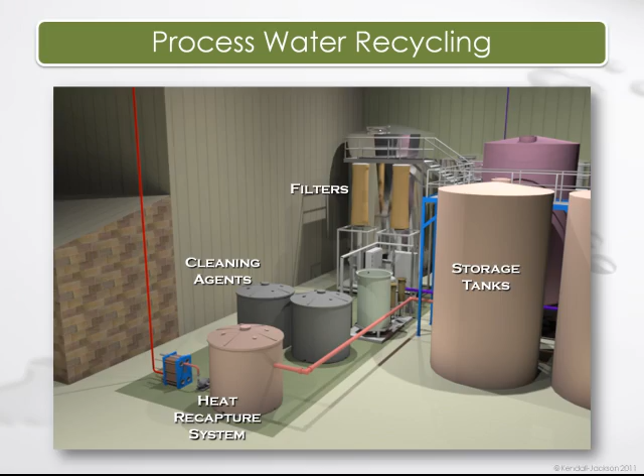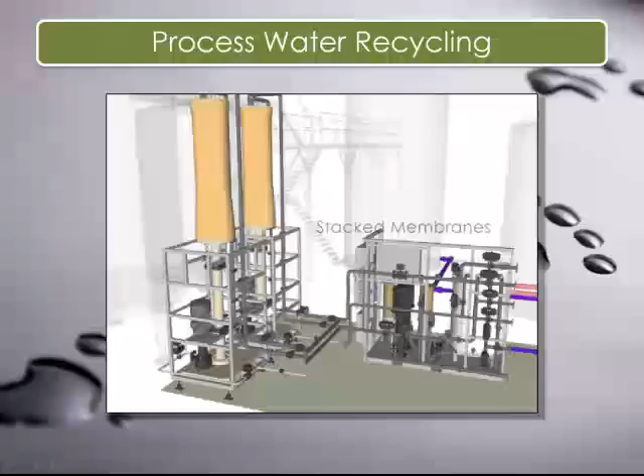All right, so the filters are really the crux of the system, and let me explain a little bit about them. They're a vibratory shear enhanced process. They're a reverse osmosis filter like you might have under your sink, but instead of being a column or a tube, they're a series of stacked membranes or plates of filters laid one on top of another. Imagine 30 of them stacked up in those columns there, one on top of another.

And the other big difference from a regular filter is that it actually oscillates or rotates back and forth on its axis 50 times per second. So those are two big differences: they're stacks of filters, and they're also oscillating back and forth.

In a regular crossflow filter, you've got dirty water that's pressurized up above, and you've got these red and gold balls which represent suspended and dissolved solids, which are trying to get through the filter, but they're a little too big. It's designed to only fit water molecules through, which continue to pass through. But over time, the solids start to get stuck in the pores of that filter and make it really inefficient.

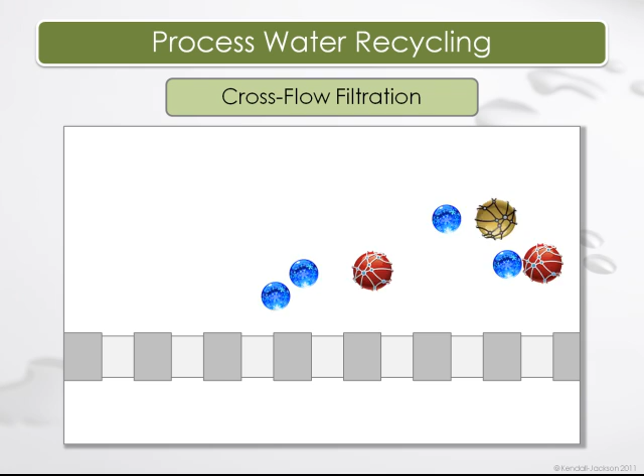And what that requires us to do is then to reverse the process, to push water up and backwash it out, to get all that gunk out of there. Well, that's really inefficient and very costly, and nobody does that process for water. Some people do it for wine because it's a higher value material, if you will.

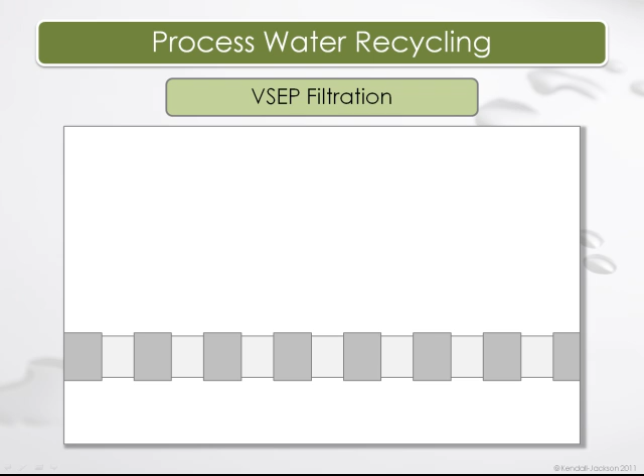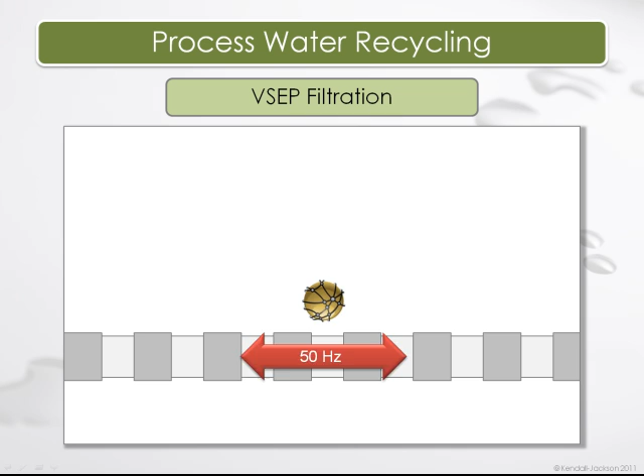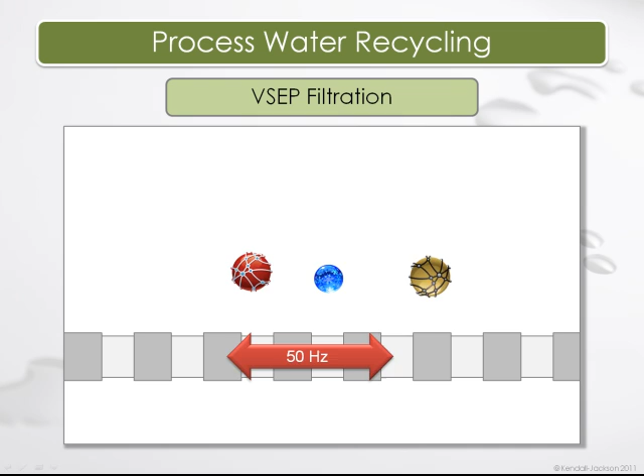But if we go back to our VSEP system, remember it's oscillating back and forth 50 times per second, and as those solids come through and they try and get into those pores and get stuck, they're jostled loose and they pass by, and the water can continue to fit through the openings, but most of the solids continue by, and it requires far fewer backwashes and it's a much more efficient system. So it's more efficient, which makes it cost effective.

Not only is it effective from a cost standpoint, it produces extremely clean water. So the water that's filtered actually is better than the EPA standards for potable water. Now, we put together our testing regime in conjunction with the University of California at Davis and the California Department of Public Health. We ran 10 different protocols over 18 months.

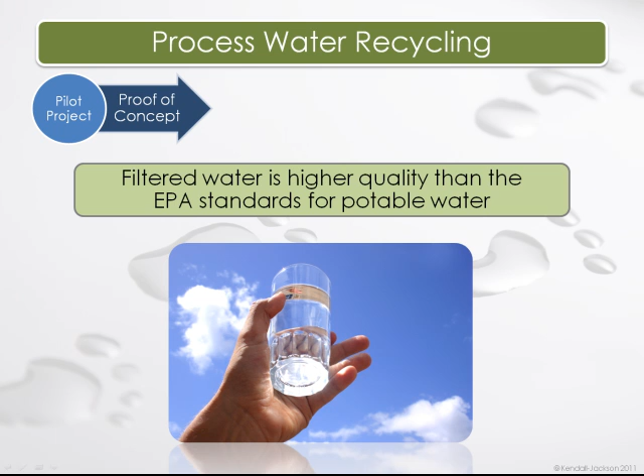We did full chemical and microbiological panels. I mean, it was a really big deal. And we tested everything you could imagine, and the water came out perfect. So it was a very effective, safe, and cost-efficient system.

So what we're hoping to do now is get to a full-scale system, as you saw before, and we're working with a couple different government agencies to try and get a grant to prove that this system would actually work for many other of the 3,300 wineries in the U.S.

So if we install that system, let's say when, we will conserve 2 million gallons of water per year, 133,000 kWh of electricity, which is equal to about 20 homes' annual usage. 73,000 therms of natural gas won't be used to heat up hot water. And when you combine that electricity and gas usage, that's equal to almost 500 tons of CO2 or greenhouse gases.

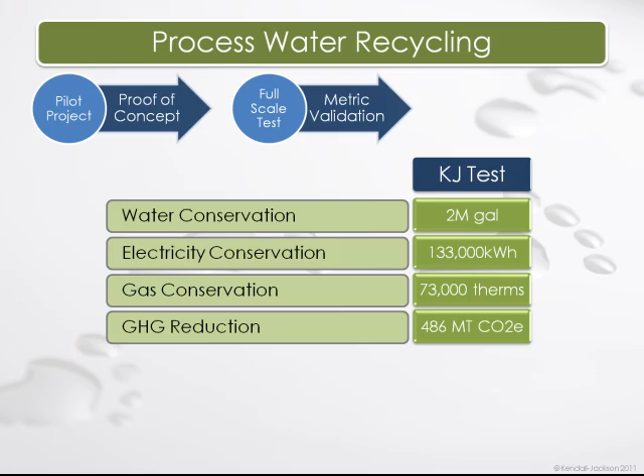And if you don't know what a ton of CO2 looks like, go to our blog site and type in the search engine GHG, and you'll see one of our previous posts that has a picture of a ton of CO2. It's pretty huge. So that's our project today.